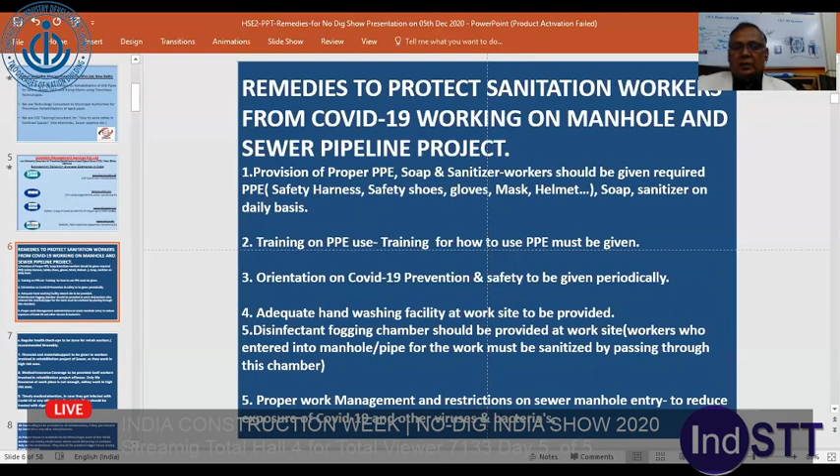Regular health checkups to be done for rehab workers, recommended bi-weekly, if not weekly. Financial and material support to be given to workers involved in rehabilitation projects of sewer, as they work in a high-risk area. Medical insurance coverage to be provided to all workers involved in a rehabilitation project of the sewer - this is very important.

Because the client insists to the contractor for works insurance and workman insurance at site, but once they are off site, they are not covered for anything. So medical insurance must be there for these people.

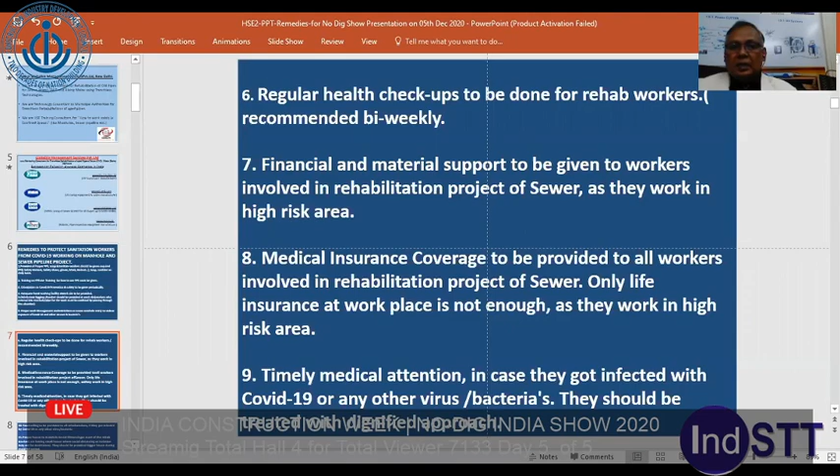Now, timely medical attention in case they got infected with COVID-19 or any other viruses - they should be treated with a dignified approach. Counseling to be provided to all rehab workers if they got infected by COVID-19 or any other kind of infection. These days, no counseling is taking place.

Proper housing to maintain social distancing, because COVID-19 has a requirement of social distancing, and most rehab workers have small houses where social distancing or isolation may not be maintained. They should be provided a bigger house during the COVID-19 period, or at least when they got infected.

Training of health, safety and environment should be made compulsory to all rehabilitation workers, supervisors and engineers. These days it's not mandatory, due to which there have been several fatal accidents on rehabilitation sites.

Separate dress for the workers for daily use at the workplace must be given. It's not a very common thing here in India, but it must be made compulsory as it is being done abroad. They should be provided a locker at site where they can keep this cloth, and there should be a change room also where they can change their clothes.

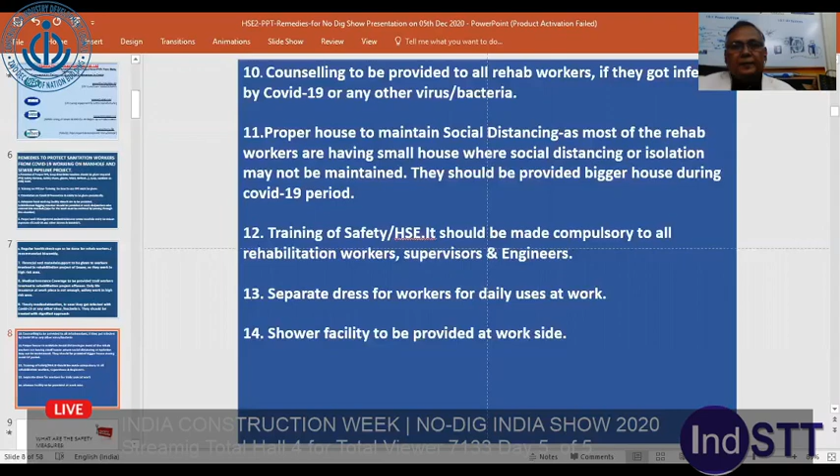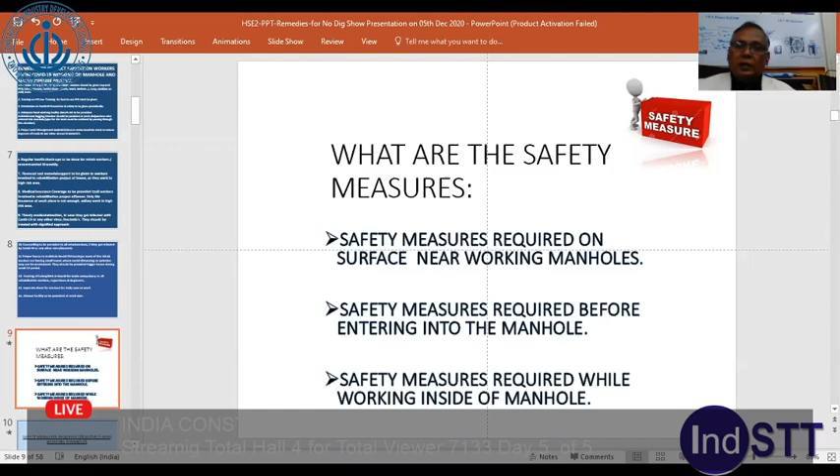Now, what are the safety measures when you are going to enter into the manhole? For a better understanding, I have divided it into 3 parts. One is safety measures required on the surface near the working manhole. Second is safety measures required before entering into the manhole. And the third is the safety measures required while working inside the manhole. Now, let me explain one by one.

Safety measures required on surface near working manhole. The area must be cordoned and temporary road closure of the lane should be there. If required, more lanes to be closed. Permission of the local traffic department must be there before the road closure, and permission from the client also should be there for entering into the manhole. Temporary barricading around the manhole. I will show you a picture in the next slide.

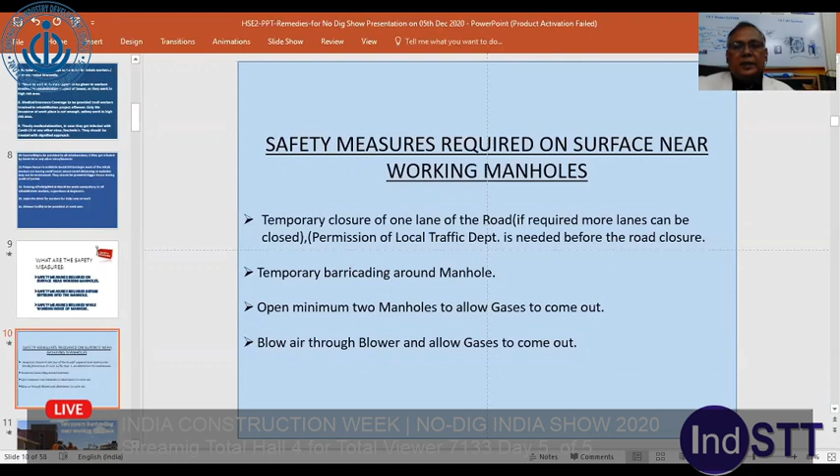Open minimum 2 manholes to allow gas to come out. So you open 2 adjacent manholes, and from one manhole you blow the air and allow it to come out through the second manhole.

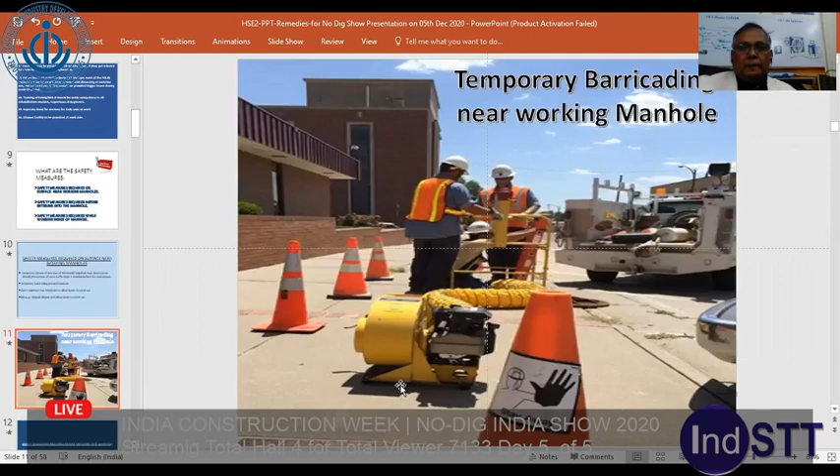Now, safety measures required before entering into the manhole. Before entering the manhole, check for any dangerous gases with the help of a gas detector. We have a detector which I will show you in the slides to come. Check visually the condition of the manhole. Walls, ladder rungs, etc. should be in a sound condition, because you are going to use them for going down. If ladder rungs are not sound, then a removable ladder of adequate depth can be used.

Wear safety harness, and breathing apparatus to be used. Installation of tripod with pulley on the top of the manhole, as shown in the slides which I will be showing you. Rope attached to the harness must pass through this pulley. There must be an HSE trained person who goes inside the manhole, and one person must be there on the top to keep watch on the person who has entered.

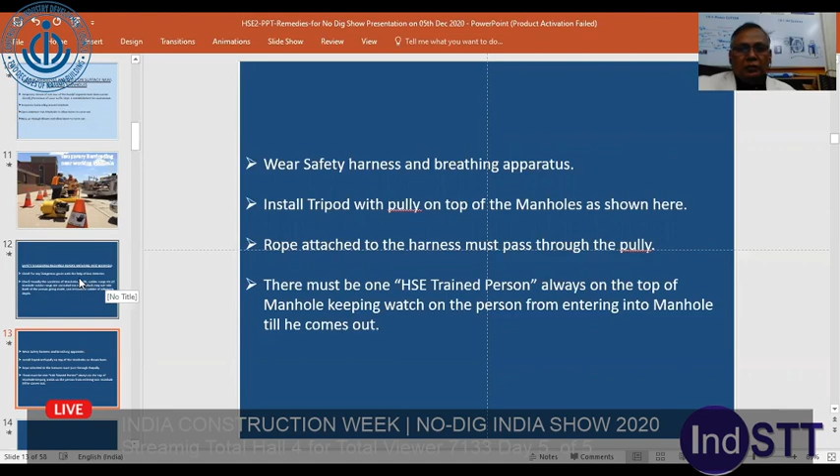This pulley in the tripod should be strong enough to take the load of the person. It should have a capacity of around 150 kgs. Before entering, keep all the tools and equipment ready which are required for the work for which a person is going inside the manhole.

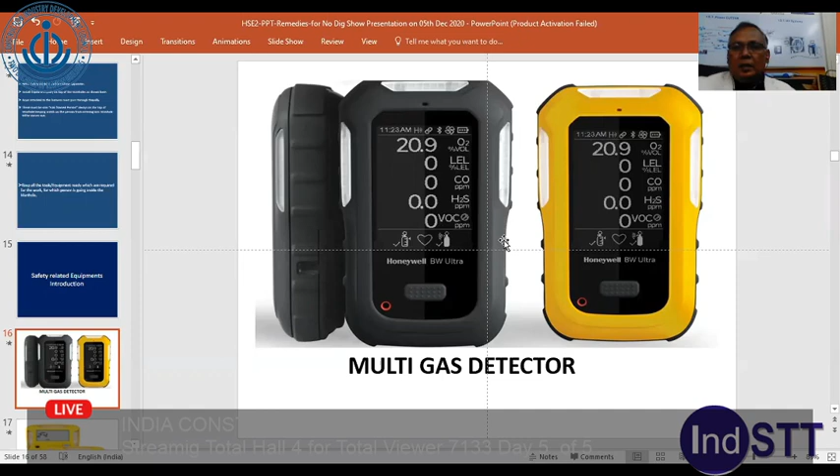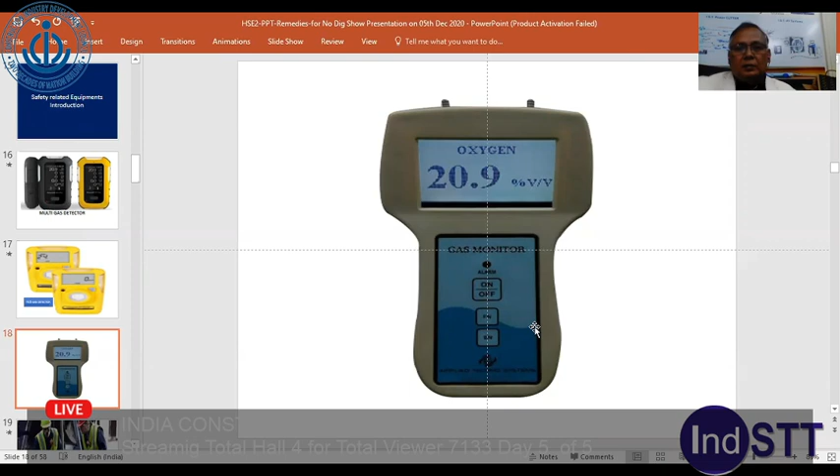This is the oximeter, which tells the oxygen level inside the manhole, if no dangerous gases are there, after those gases have been removed. Gas detection in process. This is a picture. The gas detector is there in the hand of the person, and the related cord has gone inside, which will sense, and it will give the indication on the screen.

This is a coverall which is disposable, and it should be used by every worker going inside. This is the same kind of PPE kit used by doctors or health workers today in the hospitals. The same should be given to these workers, and they should use it once they go inside the manhole to protect themselves from bacteria and viruses.

This is a breathing apparatus, because in case there are dangerous gases like H2S, carbon monoxide, methane and all, then we are going to use a breathing apparatus.

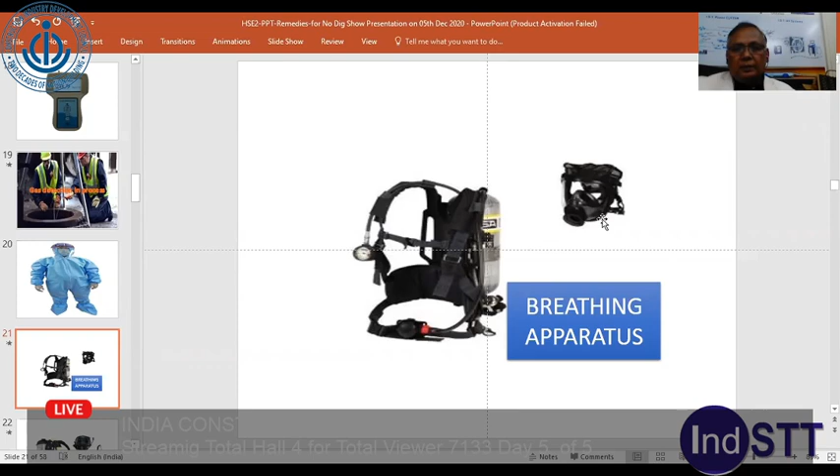Without breathing apparatus, in such a situation, no one will be allowed to go inside. And now, breathing apparatus is of two kinds. This is a self-contained breathing apparatus, where you can see there is a cylinder, an oxygen cylinder, attached to it. This is the mask, face mask, which will be attached with the proper connecting pipe. This is another picture with the connecting pipe here.

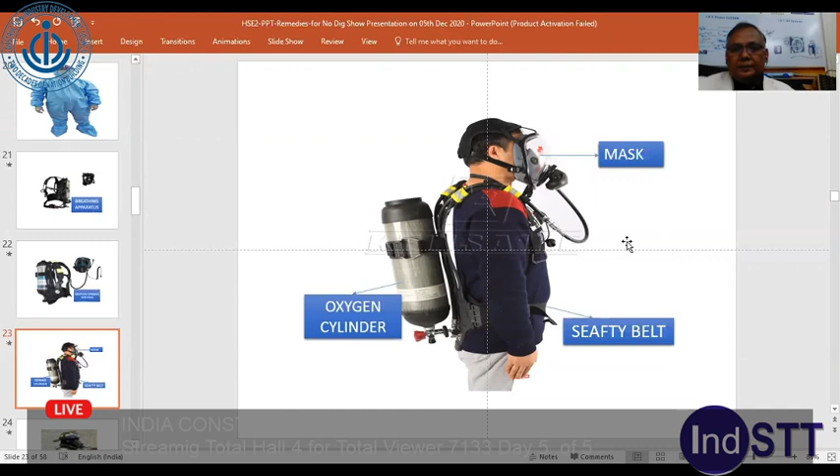This is also a self-contained, and this is a person putting on the, how it looks like when. So this is a mask, and then there is a harness attached to it, and this is a cylinder. Yes, and this is another picture explaining a self-contained breathing apparatus.

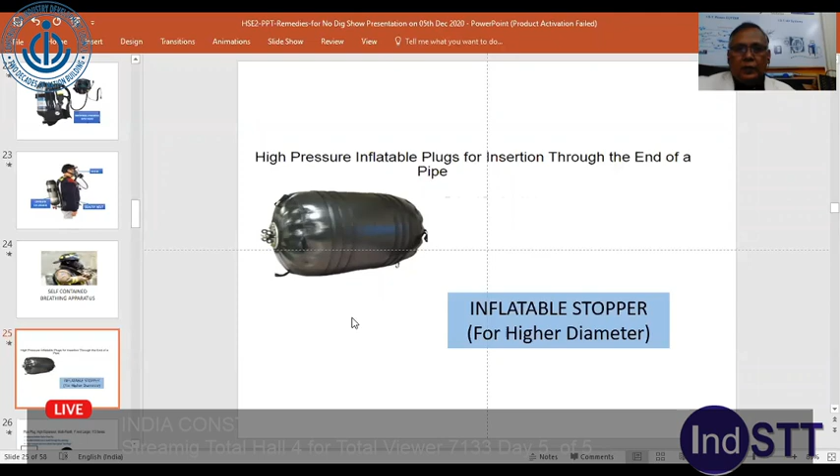Now, this is a high pressure inflatable plug for insertion through the end of the pipe. This is to stop. This is an inflatable stopper for the higher diameter, which we will be using to stop the flow at the time of overpumping to isolate the work area.

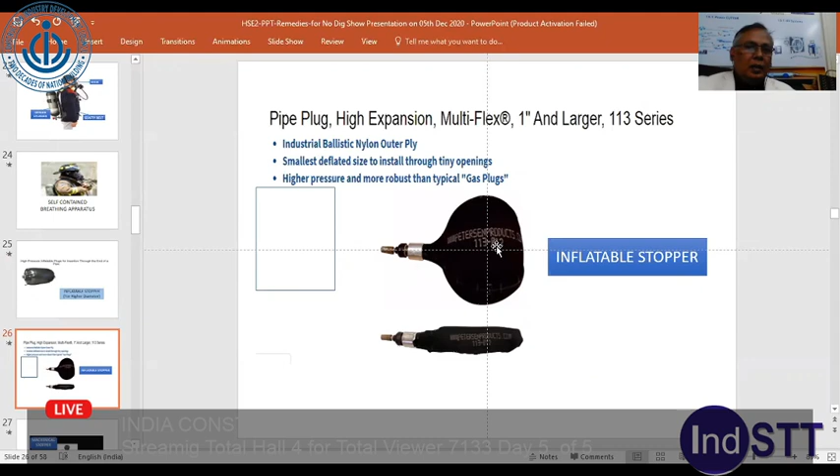This is another type of inflatable stopper, and this is basically for a smaller diameter. This is a mechanical stopper, which is used for small to medium diameter. And this can be fabricated by the contractors also. This is very simple.

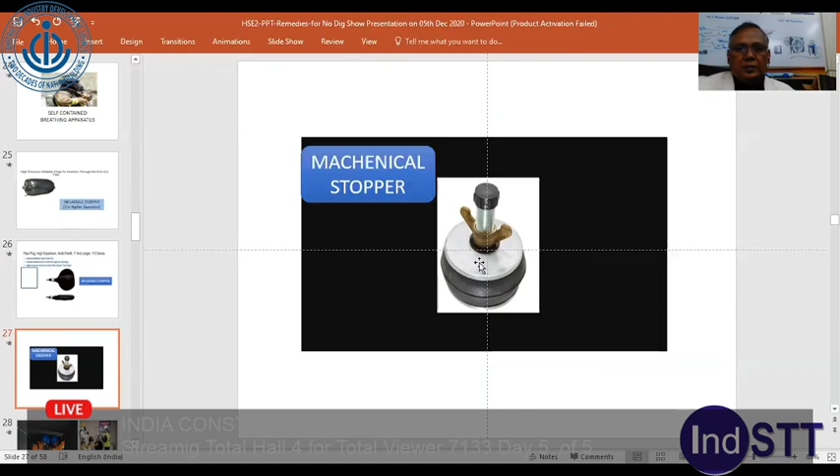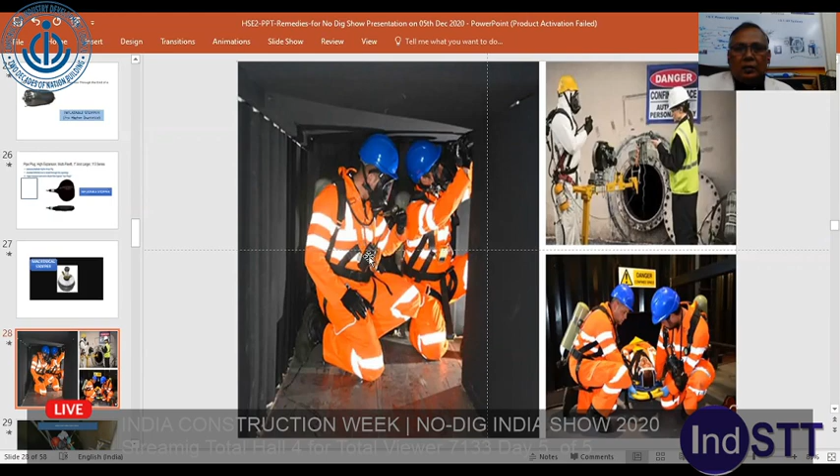These are some pictures showing how a person is having a self-contained breathing apparatus, and also a walkie-talkie here to communicate with the person on the top, using a proper helmet, safety shoes, and coverall. And this coverall also has reflecting strips for safety. This is another picture for the demonstration.

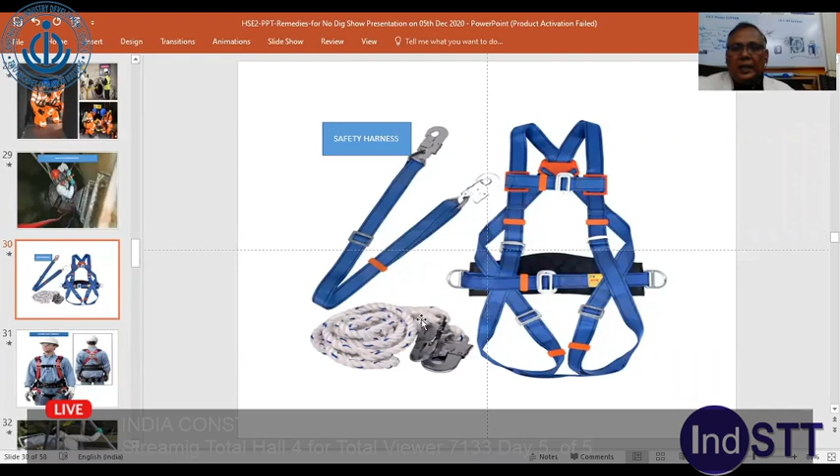This is a safety harness, which is a must to wear for the person who is going inside the manhole. This is a person with a safety harness, front and back. This is a hook, where this rope will be attached to this hook or this hook, either of these. In case something happens inside, he can be pulled without any delay with the pulley installed in the tripod on the top of the manhole.

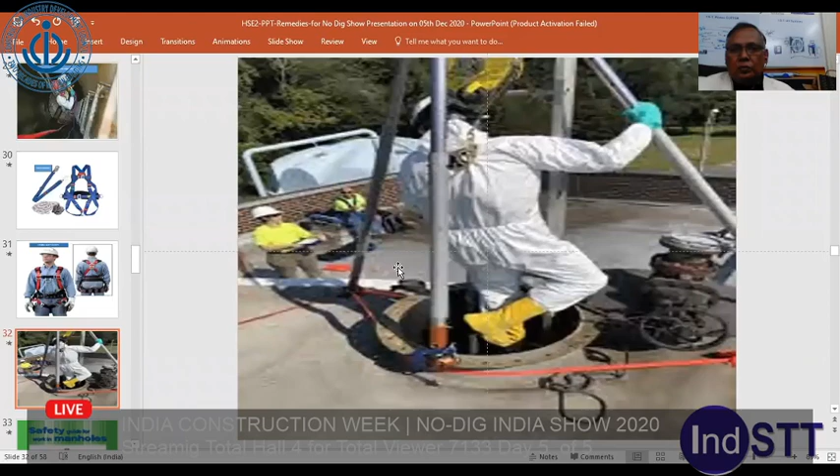This is another picture to give you a demonstration regarding a person who is entering into the manhole. He has safety shoes here in yellow color. Here is a glove, which is in light green. And this is a coverall. He has a safety helmet. And you can see the tripod. And the pulley part of the tripod is not visible here. And you can see the safety harness here and the hook attached to it here.

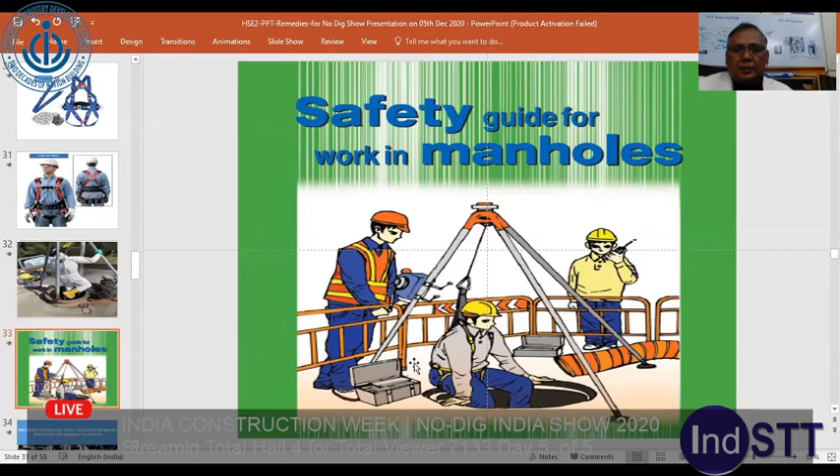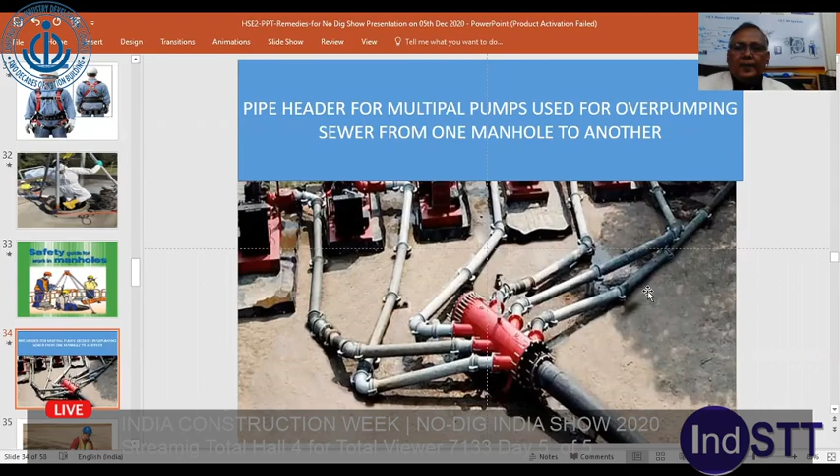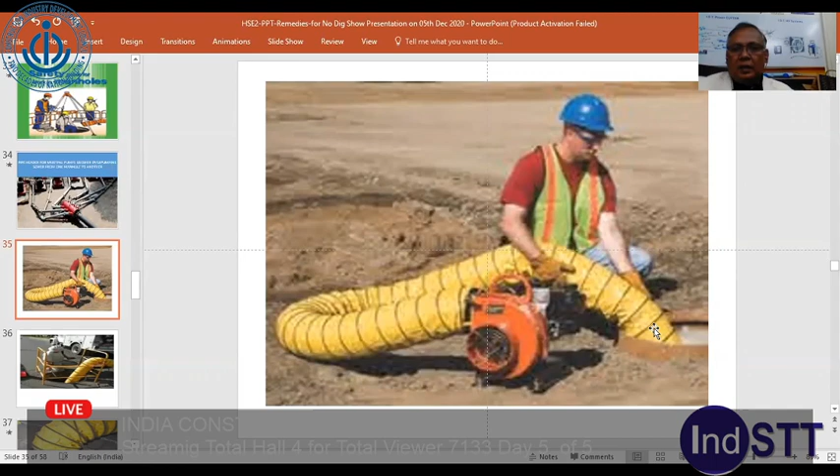These are some demonstration pictures of a blower, to blow out the unwanted gases or dangerous gases inside to make the workplace safe. This is another picture of a blower, and this is also another picture of the blower, how it's working.

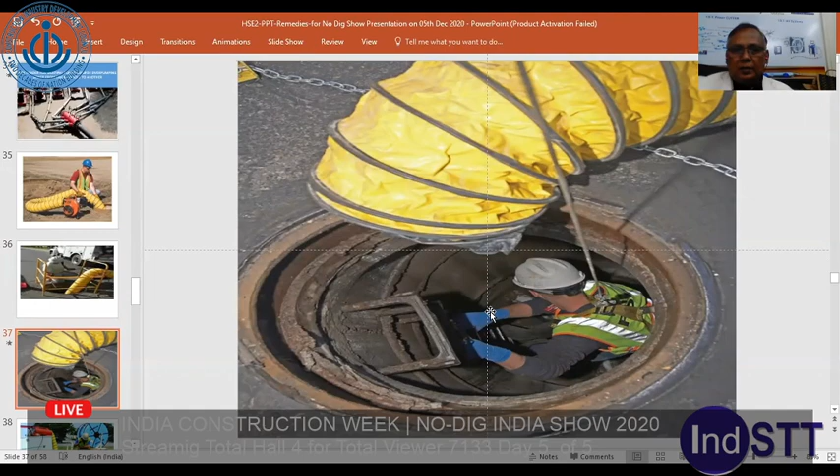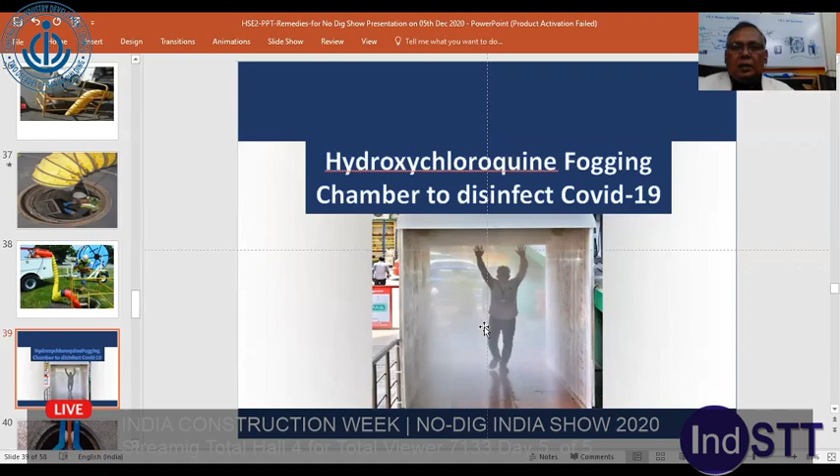This is a fogging chamber, and this was introduced during the COVID period, and this has a chemical, and hydroxychloroquine is being used as a fogging chemical to disinfect COVID-19, and this is the same chamber which is being used in all the public places and hospitals. And this must be there on the rehab project site.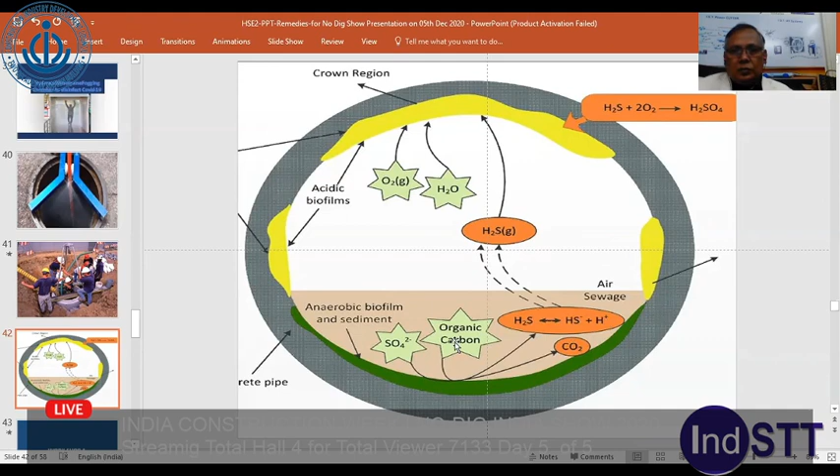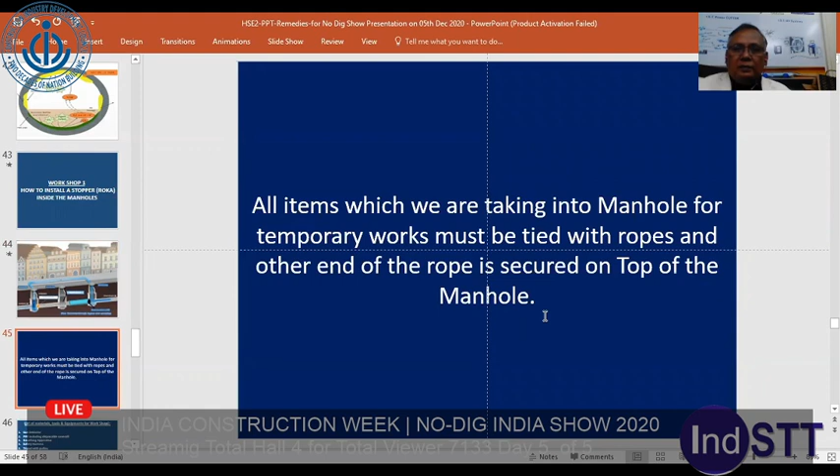All the items taken into a manhole for temporary works must be tied with ropes, and the other end of the rope secured on the top of the manhole. Let me explain. Whatever a person working inside the manhole takes in must be secured with a rope on the top. Both stoppers should also have a rope connected, with the other end tied up here on the top. This is in case it slips out or fails, so it does not go inside the pipe and get stuck somewhere, to avoid further damage.

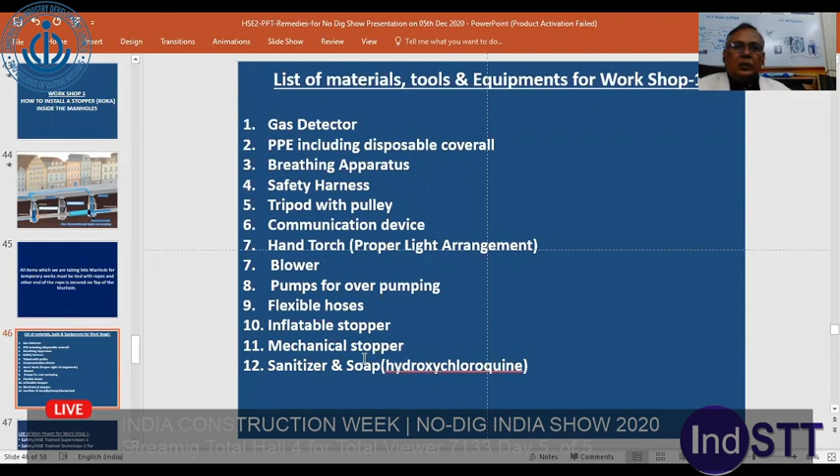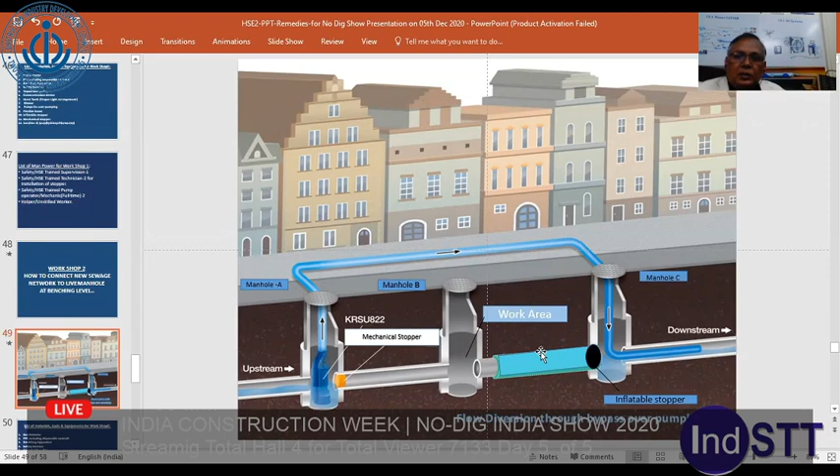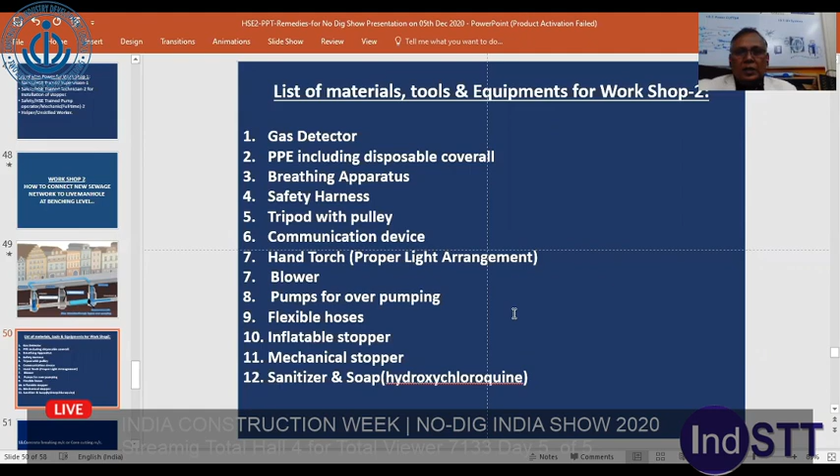Then flexible hoses connecting to the over pumping pumps. Then an inflatable stopper or mechanical stopper, whichever is available, but it must be used. Then sanitizer of adequate quantity and soap. Then hydroxychloroquine should be there at site, so I'm mentioning it here. Apart from that, there is a concrete breaking machine or core cutting machine to make the hole in the existing manhole, which we have considered is a concrete manhole.

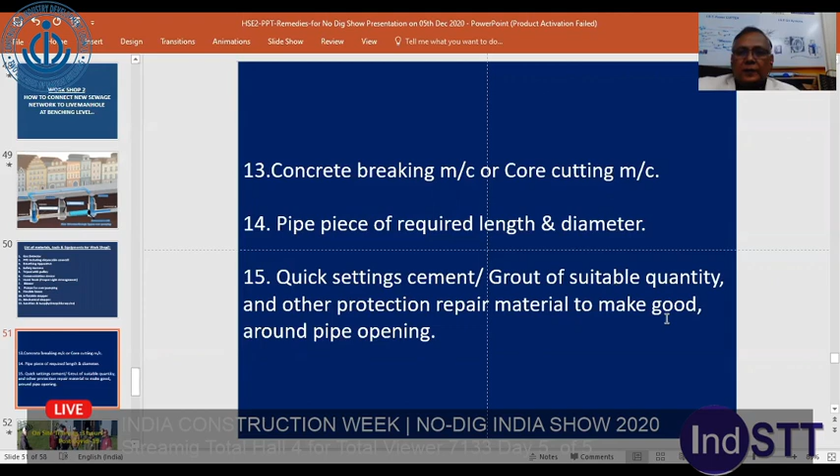The pipe pieces of required length and diameter, which will be connected to the manhole. Then the required quantity of quick setting cement or grout to make the opening area good after the pipe is connected. This training will be an on-site training after COVID, and probably it will be of 3 hours.

During COVID, it will be a little shorter. It will be online and it will be of 2 hours. And this training will be done in coordination with IndSTT, India, and certificates will be issued to all the participants, signed by the trainer as well as the Indian Society for Trenchless Technology. And the validity of the certificate may be 2 to 3 years, that we have to discuss.

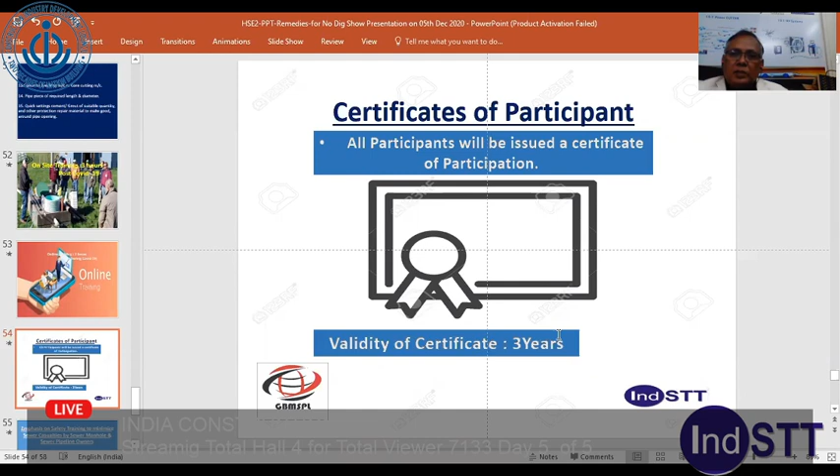And this will be a must for the people who are working on a sewer network, on a live manhole, or septic tank, so that they know what they are doing. They are aware of what the gases are, and they know which tools are to be used and all. Without this training, people are going inside and killing themselves. So this training is a must

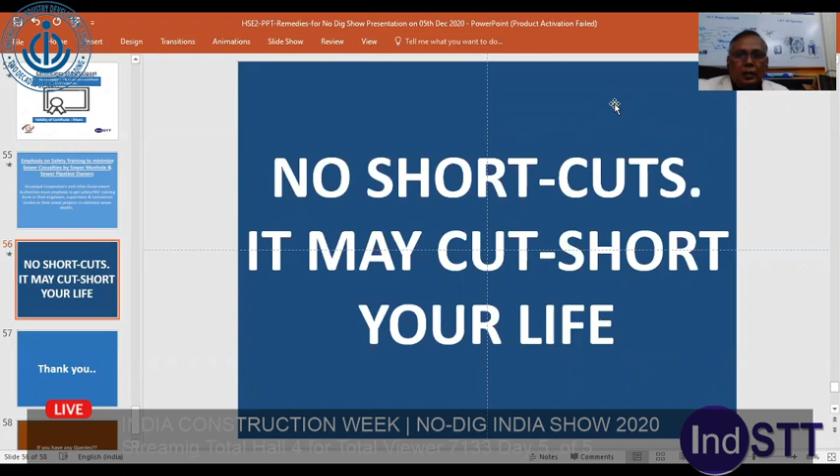to minimize sewer casualties. Hence, all the clients are requested to make this training compulsory, particularly municipal corporations and the other water authorities, Jal Boards, to minimize deaths in the sewer. This training should be given to engineers and supervisors of the municipal corporation, and also to the contractors' supervisors, engineers, technicians and other workers who are directly involved in the rehabilitation of the sewer line and stormwater line. No shortcut to be made, because it